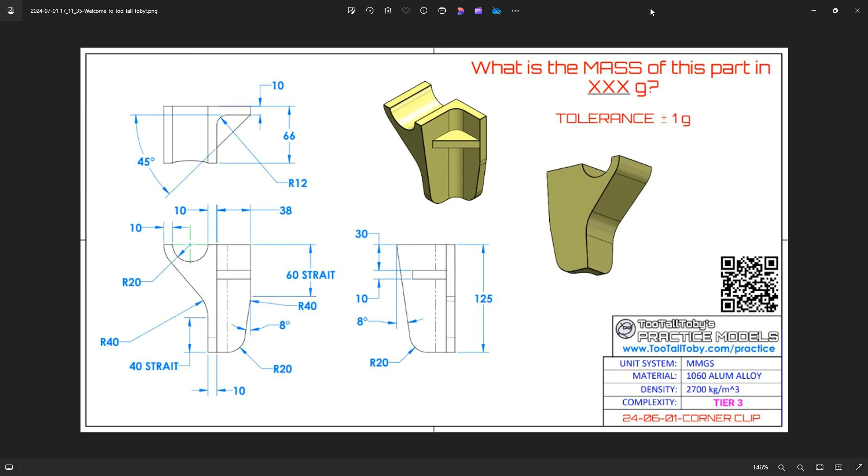Let's move this over to the other screen and I'll build this in IronCAD. First we're going to start off with just a drag and drop extrude, because a lot of times you can start with this versus a sketch, since we know the overall dimensions of this thing.

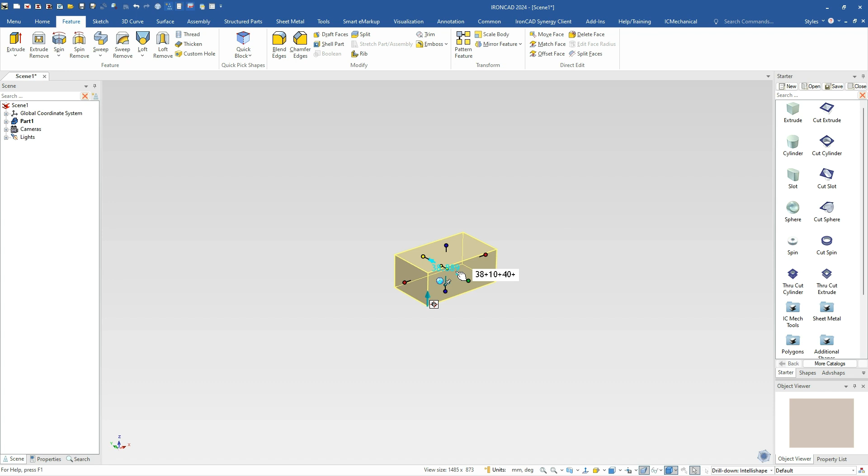We know the length or width of this thing is 66 from the dimensions, and the other side has got a 38. I'll do the math here to show you: 38 plus 10 for the width. We also have a radius of 20, so that's going to be 40 plus another 10 on the other side. The total of that is 98, and the height of this is 125. So again, that's 98, 66, 125 - those are our overall dimensions.

We'll start with that, and then we'll start removing material to get our shape. The next one I'm going to do is basically just this corner here, and I'm going to rotate down so I can drop an extrude cut here, which will allow me to cut off this geometry.

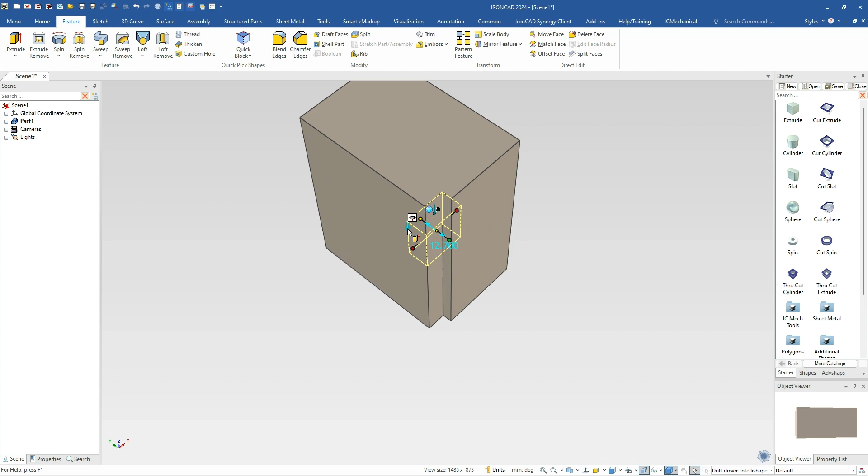The way we can do these is just kind of snap these to the side to get the offset geometries if we like. So we're going to move this over here to the far side, and we know there's an offset of 10, so we go over here and subtract 10, or you could have just put in 56. We also know the overall length of this cutout is 38, so we'll go ahead and put that cutout there, giving us our cut on that geometry.

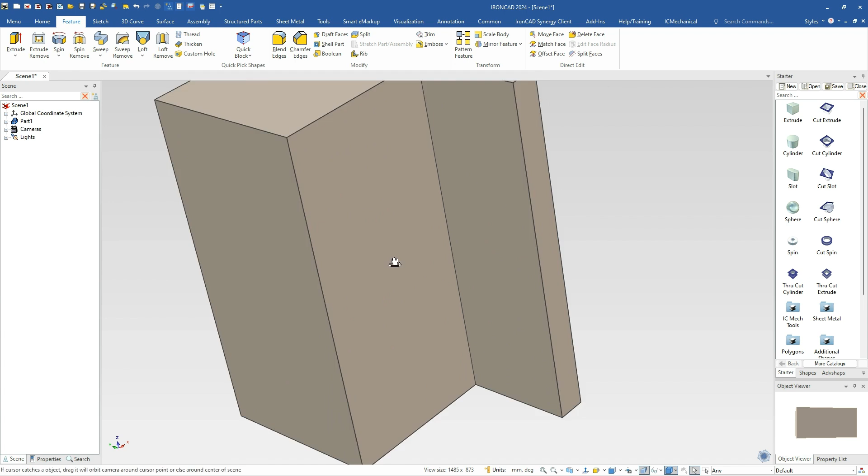Since this is in place, we have basically a cut cylinder here that's right on the center of this edge, so I can just drag and drop that on there and set the diameter for that to be 40. That gives us the information we need, and it has to have a 10. If you look down at the bottom, it'll show you 10 millimeters on that side and 10 millimeters on that side. That gives us our basic geometry for the shape.

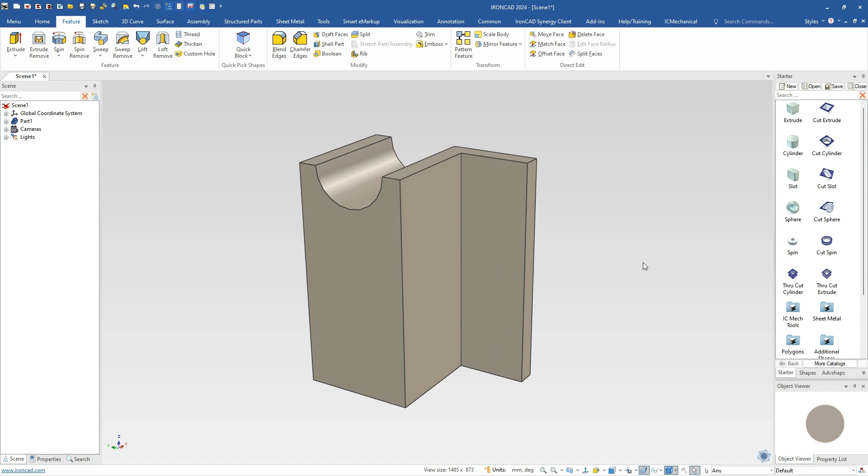Next, we'll go ahead and do this cut here that's got an angle of 8 degrees. This one I'll show you how to do it a different way, just a different approach. You can do it multiple different ways, but we're just going to drag and drop a profile here. I'm going to drop it on this corner and line these up here.

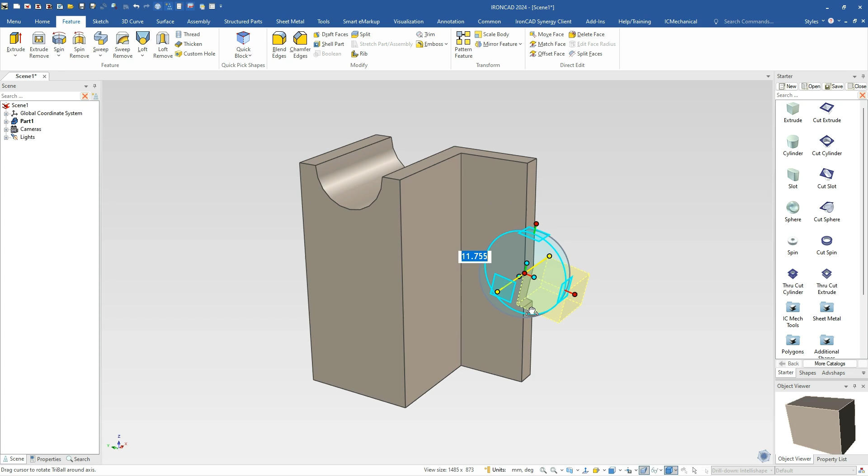The reason I'm doing that is I'm going to put my starting point up here, and I'm just going to move it down for now - we'll move it down to 60. We'll have to move this again later, but anyway, we move it down 60, and we have to rotate it in 8 degrees. That's our cut, and we can now pull that out.

So why we're going to have to move this later is what I'm going to do - instead of doing the blend from this edge, I'm just going to do a regular blend right here, and it's got a value of 40 on that radius. Go ahead and hit OK.

So doing that, it added material to our edge. We know that we have now, if we look at this, it says 57.203. That's not what we want.

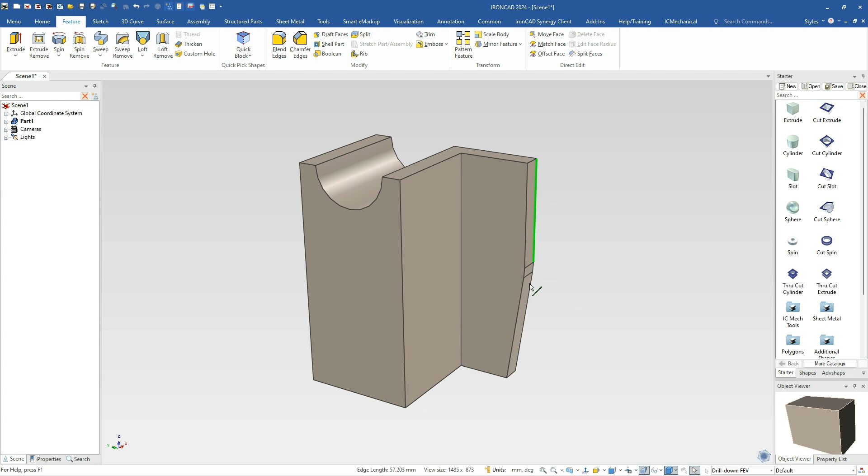So what we can do is select our shape here, turn our TriBall on, and simply hit our space bar and reposition it to the top of this edge here. I'm going to align it to this vertical straight edge, and now I can lock it and say, give me the distance from that edge.

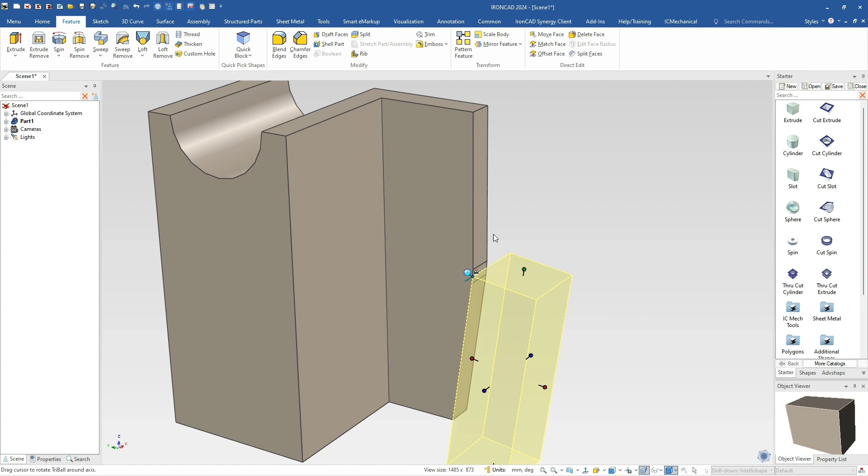Actually it needs to be a distance from this point of 60 millimeters. So that will move it down from that edge, and basically moves my blend with it because the edge moves, but it will give me my value of 60 millimeters. So I don't have to go into the sketch and do anything there - I just move the things around, and this will give me my shape or my geometry that I need.

All right, so that's one way to approach it. So let's go into the other side here, and this one we'll just use our typical sketch geometry.

Again, I'm going to drop on the corner point here, just for alignment purposes, so I'm going to line the side and the bottom up. Then I can move this over here and offset it - we'll type in 50 to get that value.

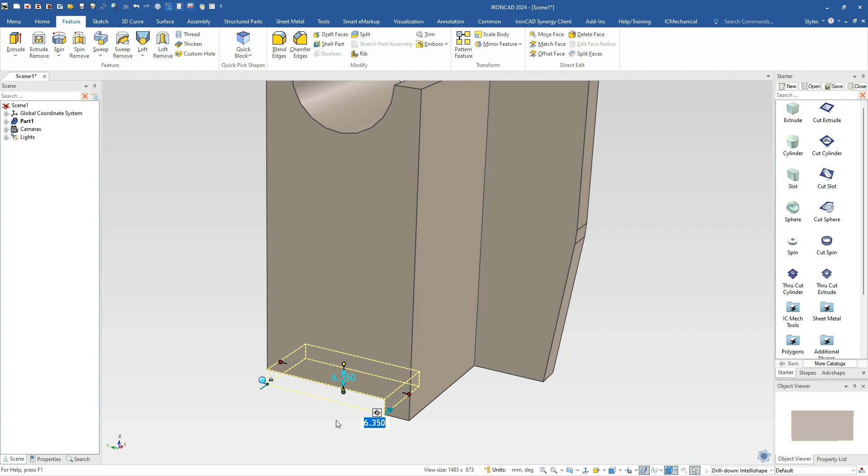And we know our height, since I aligned it to the bottom edge, it's got a height value of 40. So that edge right here now, if we look at that, is 40 millimeters. Okay, so that gives us a way to get us our starting point, if you will.

I'm just going to hit Alt-E, which will put us into our sketch mode. And this is the direction, since I was extruding into the material, I'm just going to flip it using this flat view, over to this side, so I can get my geometry the way I like it.

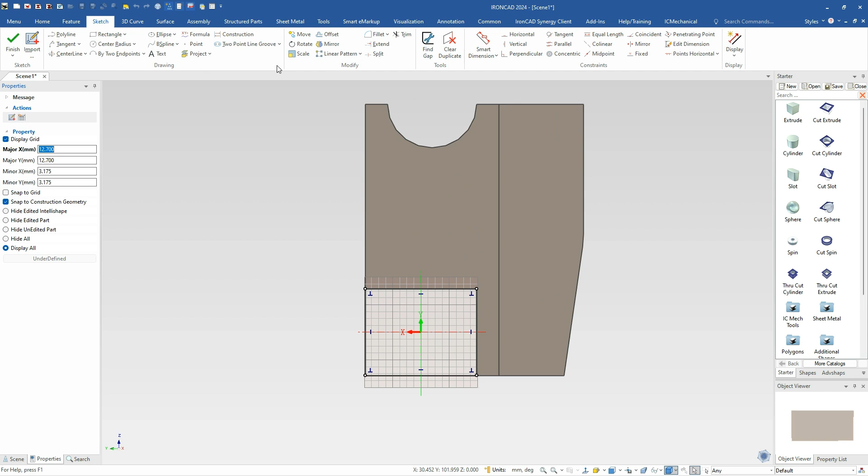Next, I'm going to do some projection geometry. So I'm going to project this arc for a temporary purpose, and offset it 10 millimeters inside of there. That will give us our arc that we're going to use here to draw a tangent line to that, and we need to have an arc here.

So I'll just do a 2-point arc, and draw this arc up here - I'm just going to start it and draw it. Doesn't really matter, because what I'm going to do is put some constraints on this. First thing I need to do is make sure that that is tangent to that, and I want to make sure this has a radius of 40.

Okay, so that gives us our starting points for these inside of here, and now our curves, we can do a lot of things here. We have a little handle here that we can move around and make longer or shorter, however we like. So we're just going to make it a little bit longer, so make sure we get a tangency value here.

So we're going to put a tangent line to our top curve, so you can see that it makes a tangency to that line, and I'm going to come down here and move along this until I see that little blue indicator showing a tangency, and click to place that. So now I have a tangency line to both curves here, and I can just simply trim it away.

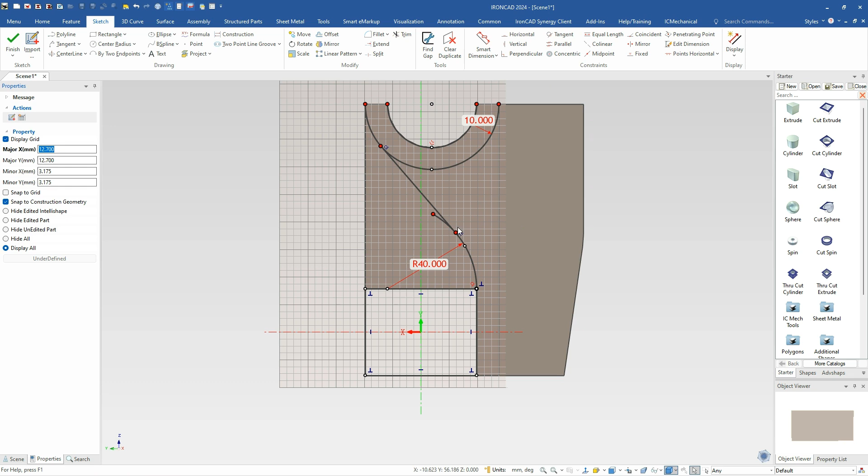So I can click to my trim command, trim out that geometry. I don't need this arc that we created, and it's just telling us there's an offset constraint, so we'll go ahead and delete that and delete this extra part of that curve. That will give us our profile, and I don't need this line anymore, and I'll just move this point up to the top.

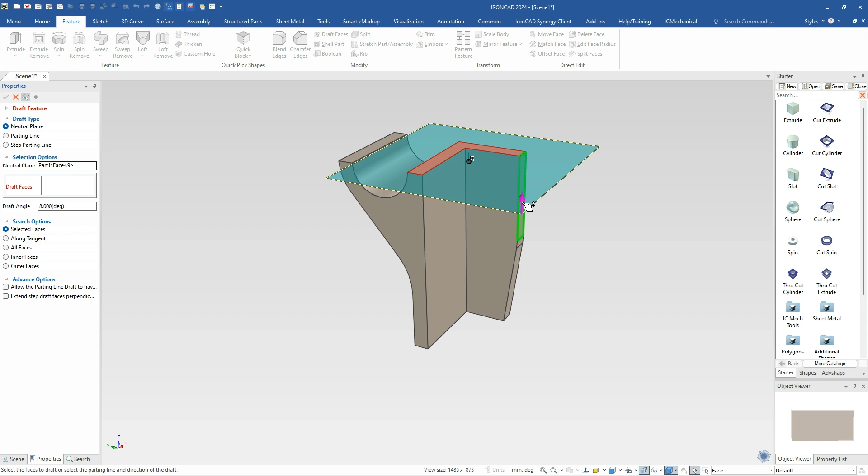So a simple way to build that inside of here, and it's going to extrude through that geometry. Next thing we know is we have a draft on this face, so I'm going to go ahead and hit draft face command, and I'm going to select this top face, and I'm going to change my direction here by just clicking on that arrow, and I'm going to say move that in. 8 degrees is what we want, and hit OK to draft that front face.

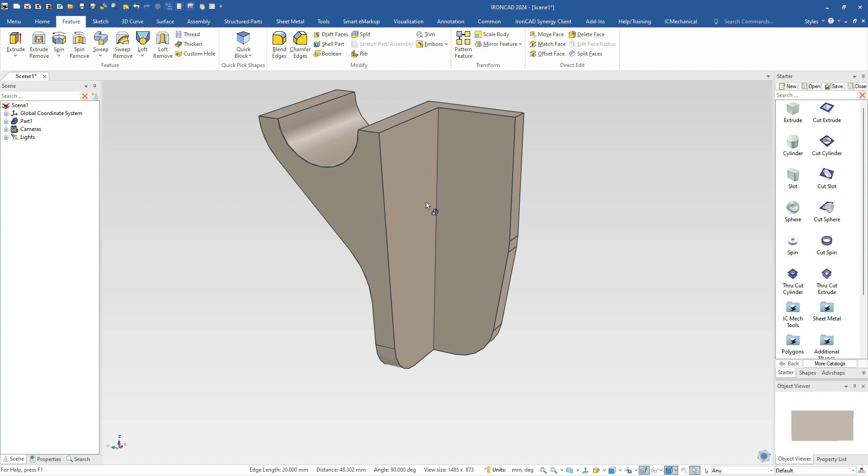Next, we can put our blends here on these bottom edges. So I'll go ahead and select both of these two edges, and they have a blend value of 20 for those on the radius, and we'll just hit enter a couple times to apply those. And last thing that we need to add is this rib feature and a blend. So you can drop the blend on first, or you can drop or blend to individual edge. Either one will work. I'll show you how you can do that the latter way.

So I'm gonna drop over to my shapes catalog, and I have down in here a rib feature, and I can just drop this right on this face. And what I'm gonna do is just use the handles to do this. Again, I'm not gonna use any sketches. I'm gonna make sure that this is dropped on this face, so it's aligned to that face, and I'm gonna align it to this edge. And it says it's 45, so if this is 38, the other size box handle needs to be 38 as well to give us a 45-degree angle there.

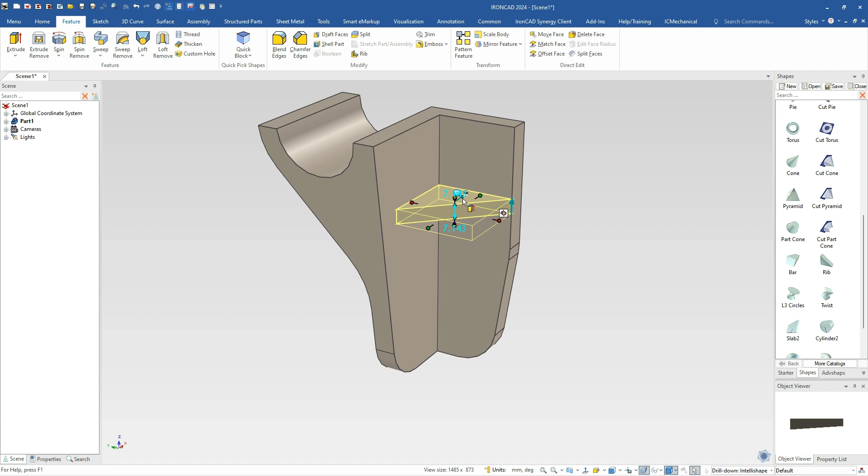And now we just need to set its height, which is 10 millimeters. So let's go ahead and click that handle there, and make sure that it's correct. Yeah, 10 millimeters for the width of that. And we're going to use that handy-dandy TriBall again. I'm going to hit the space bar to move it up to the top face, and we just want to set the distance by right-clicking, edit distance from point, this top here, and we know that it has a depth of 30 from there. So that's 30 millimeters from the top.

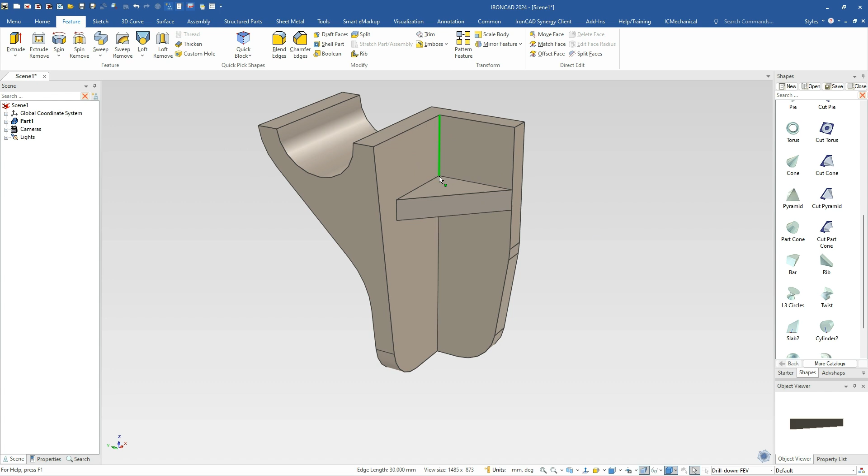Okay, so this is what I meant. Now we have an edge. If we select it, we have two individual edges, so we can just hold our shift key down, select both, hit blend on that, and the value for that blend is 12. So that's kind of our shape here, and what we need to do now is get our mass for this. So if we go over to properties, the mass density they called out for this is 2700, and we'll just tab out of there, and that should give you a mass of about 575 for that part.

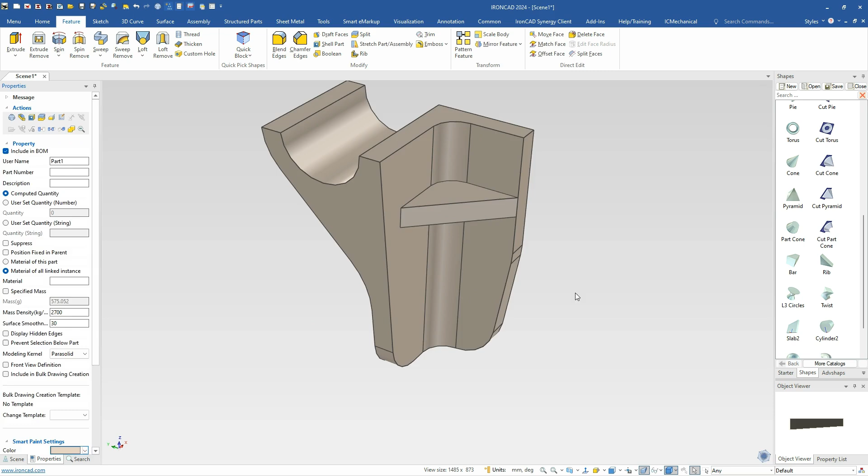So there you go. That's how you can build this model in IronCAD, and just a couple different ways to do that. So you can do one without any sketch interaction to create this blend here at a certain distance, or you can use the sketches as normal and just use your originating curves and add to it to get your geometry. So hopefully you enjoyed this video, kind of a unique little way to build this model, but fairly easy to do. And you can always change some things in IronCAD if you're wondering why it's not too

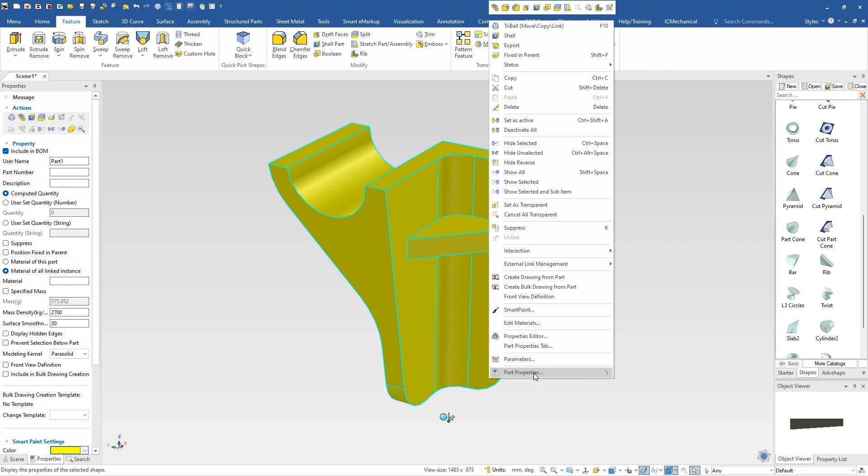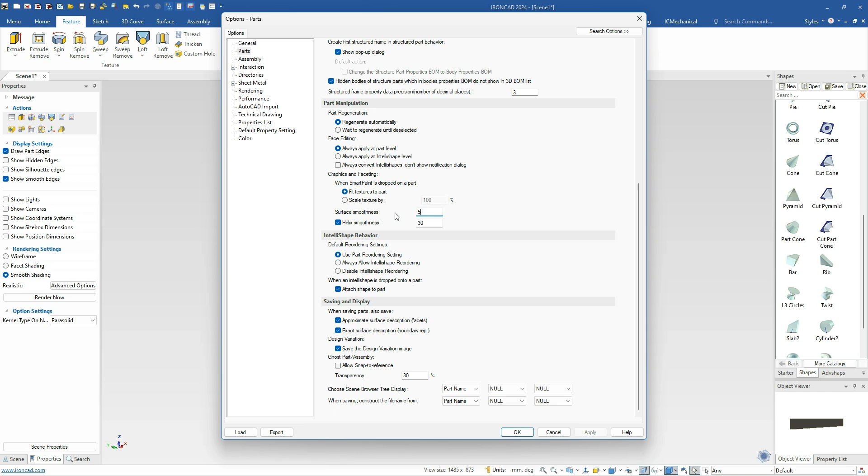smooth here. We have a default of 30 for our surface smoothness. You can bump this up to whatever you want, and that'll make your arcs and things like that look a little bit cleaner. And you can set that in your tools options if you like. If you're just working in IronCAD and you didn't know this, you can go into your part settings and scroll down. There is a value here for our surface smoothness, and you can set that higher by default, so it'll be a little bit better. So if you want to set 55, for example, all your arcs, when you drag and drop those out, will now look a little bit sharper.